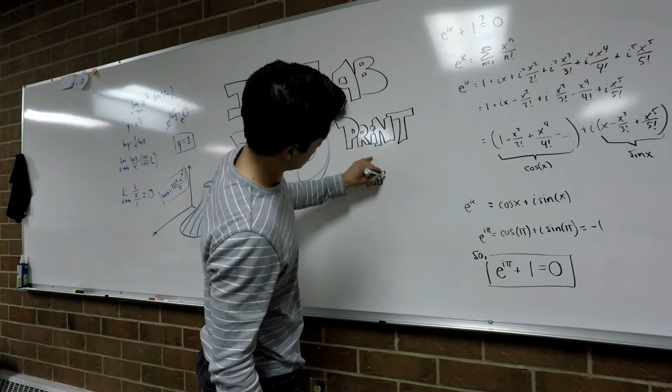Let's head over to SolidWorks and get started. This shelf is going to be used to house all of our future prints for every episode of Print of the Week. So let's get started, I just started a new part.

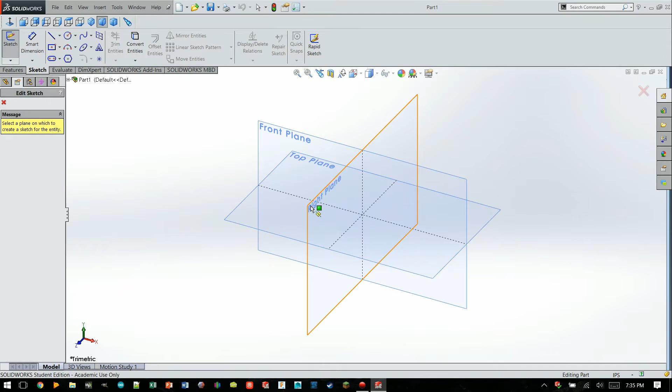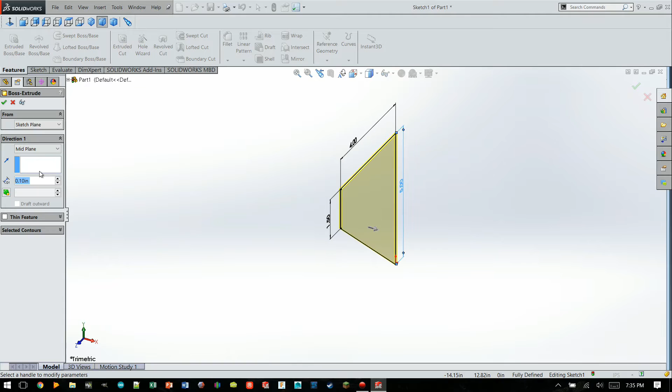I'm selecting the right plane and drawing a rough outline of what I want the part to look like. Then I come in with the dimension tool and add in all the dimensions I want. I'm keeping this pretty simple, but the goal for these episodes is that you guys could follow along and try to make it yourself, and you can even download the SolidWorks files and STL files in the link below.

So you can see I extruded it. Something new that I did was extrude from the mid-plane. This is a pretty valuable tool, and we'll go in more depth in future episodes.

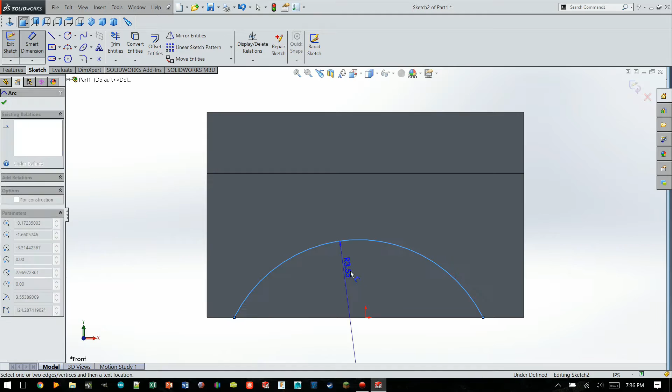So you can see I'm trying to add a little bit more character flair to it. I added a 3-point arc, dimensioning that to be about 4 inches in radius, and then I just centered it. This is going to make a really cool looking cut through our part.

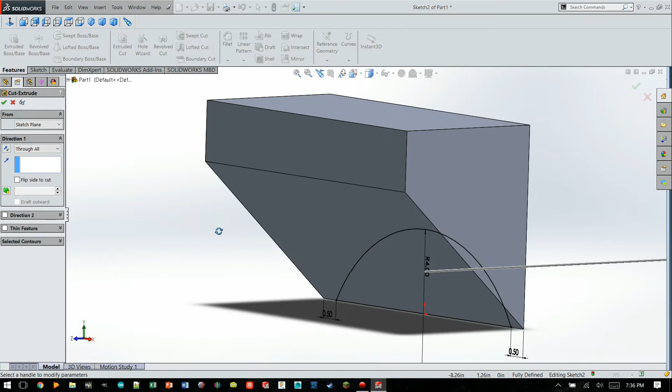So far it's looking pretty good. We need to complete that sketch so it's a closed surface, so I can actually cut through it. I'm selecting through all, changing the direction, and that makes a really cool cut profile.

I'm then going to start adding the guide curves for our letters. I want 3D print on the top line and of the week on the second line. These curves are just here to help keep me organized while I'm working with the font tool.

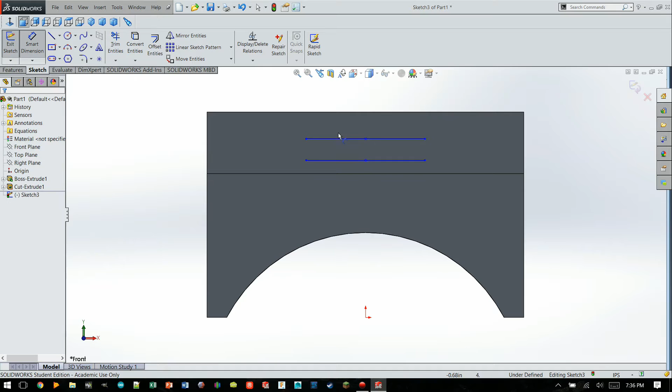You can see here I'm centering it, so our letters are going to be perfectly centered. I'm also dimensioning it to be about 4 inches long and about 0.65 inches in height between the two letters. I'm making the letters about 0.6, so that should make for a good balance.

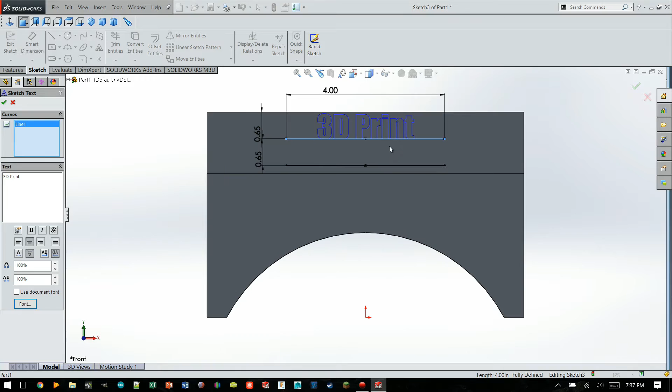So you can see here it came in upside down. Using the font tool you can flip it and change the direction. I'm also going to change the font to Impact - this prints extremely well - and I'm making it 0.6 inches tall.

I'm also going to make these two lines a construction line, so they don't interfere with our font. So you can see I'm adding 'of the week'.

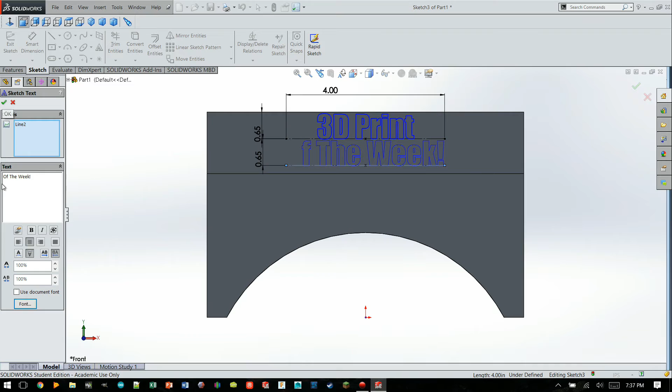Don't know what happened, I got a little bit of a glitch. The 'o' and 'of' just disappeared, but that's pretty easy to fix. Literally, I don't know what happened here - I go to check it, it just disappeared. It's kind of funny, I'm like, what? What just happened? But it's pretty easy to fix, just put it in again.

That fixed the issue. So now that we have '3D print of the week' and our two guide curves are construction curves, we can cut into it, and I know about 0.2 inches is a good cut.

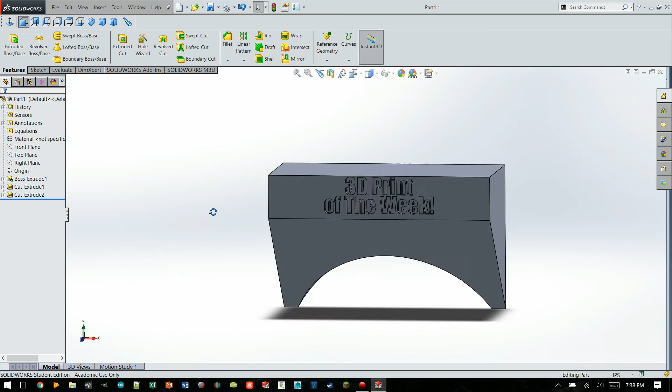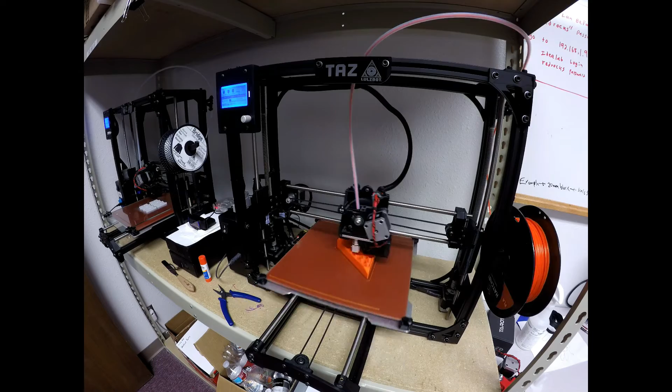So that's the part. Let's head on over to Simplify3D and queue up the print. For this, since it's a large print, I'm doing very low infill, about 10-15%, and I'm also only doing 2 to 3 sidewalls and a honeycomb infill.

I'm also trying something new - there's no top and bottom surfaces, so you end up seeing the entire infill pattern all the way through the part. This creates a really cool effect, and you also get a really cool curve with it.

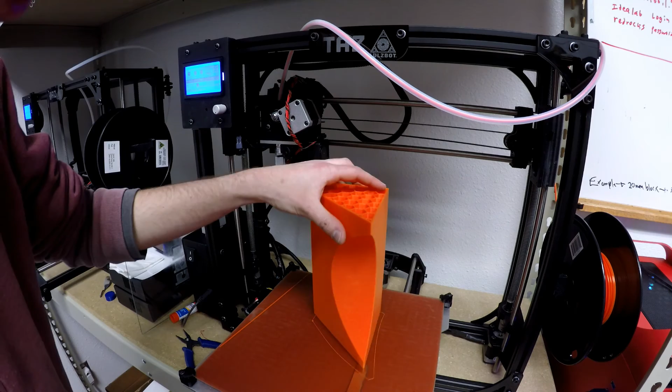Since the print's almost done, let's pull it off and put it on the pillar. Perfect.

3D print of the week!